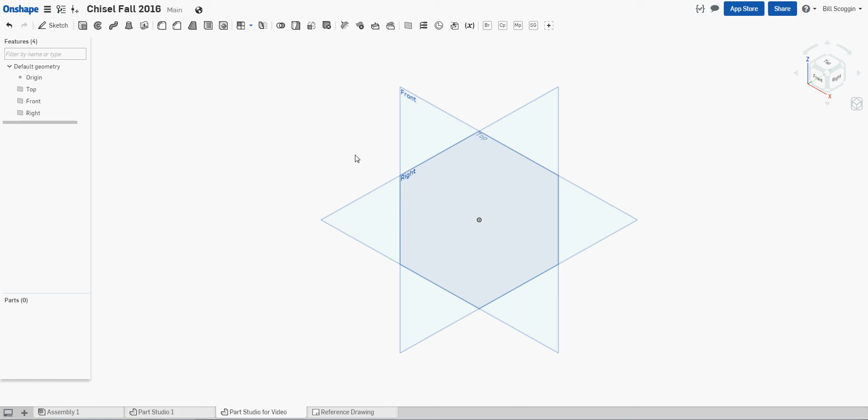Okay, going to draw the chisel based on the tutorial you were given in class, starting with creating a sketch in a part studio on the front plane. View normal to the front plane. Draw the side profile of the chisel, looking at our dimensions at 7.25 inches.

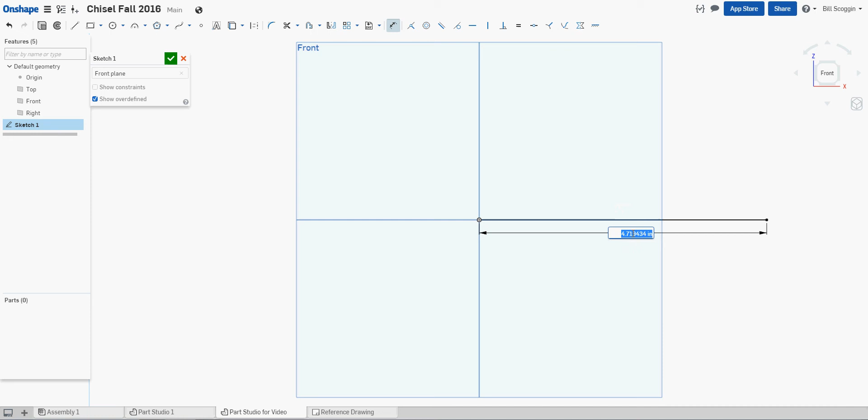Everything we'll do will basically be based on the dimensions of this and the origin of our drawing. Going to come up, over, over, down, and draw one more line up here.

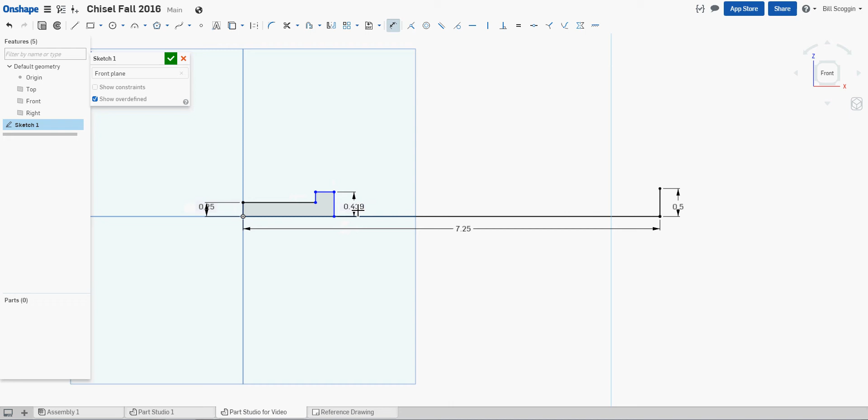Now I'm going to assign some dimensions. This is 0.5. I know this is 0.25. I know this is half of 0.812, or 0.406. I know this is 0.187. And I know this is 1.687.

I also know I've got a couple of key points where arcs and such occur, and one of those is at 4 inches to the left of the end, so I'll use the offset command to do it. Offset is one we use quite a bit in these drawings. I'll offset it again to the left at 3.5 inches.

That's going to be two key points right here. Also, these two lines, I'm going to go ahead and make them construction lines because I don't need them to be part of the final model. Another...

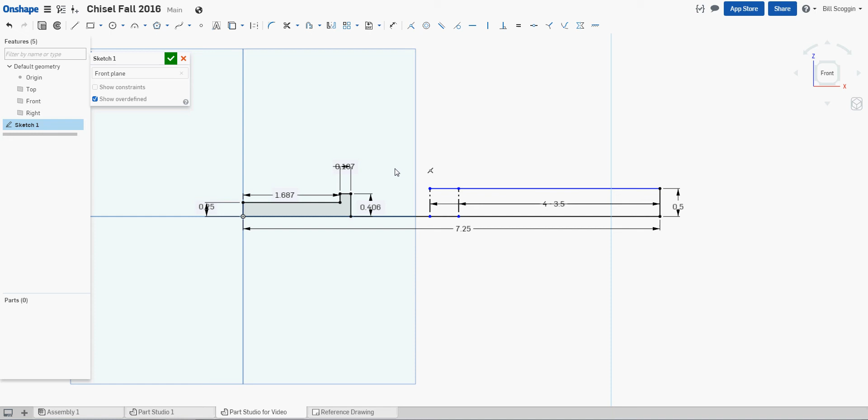...thing I'm going to do is draw a line from here. Come on, line command. From here to here. And now I'm going to extend this line over because I know the line of the body from here and here is the same. So I'm going to use this command called extend, which is a very useful command.

I'm going to extend it over to here, and then this area right here I'm going to cut out because I don't need it. So I'm going to trim it away.

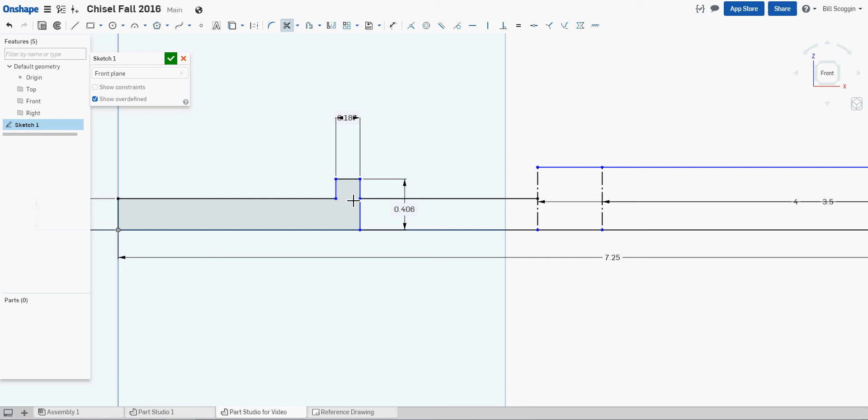And now I'm going to do the radius of this cut. And I look at my drawing, I see it is a 1.25 inch diameter circle. So I'm just going to draw that circle up here somewhere.

I've noticed this trick works really good for this particular drawing. I've tried it about 100 other ways, and so far I like this method the best. If I come up with something better later, I'll do another video showing a better way of doing it. But for right now, I'm happy with this.

I'm going to use the offset command, and I know that the distance from here to here is simply a quarter of an inch because this is 0.25 and this is 0.5, so I'm going to offset this line upwards by 0.25.

And I'll drag this out where I can read all this a little better. Put that diameter up there, and all I'm left with is this little arc that I need from here to here. This arc needs to be placed from here down to here.

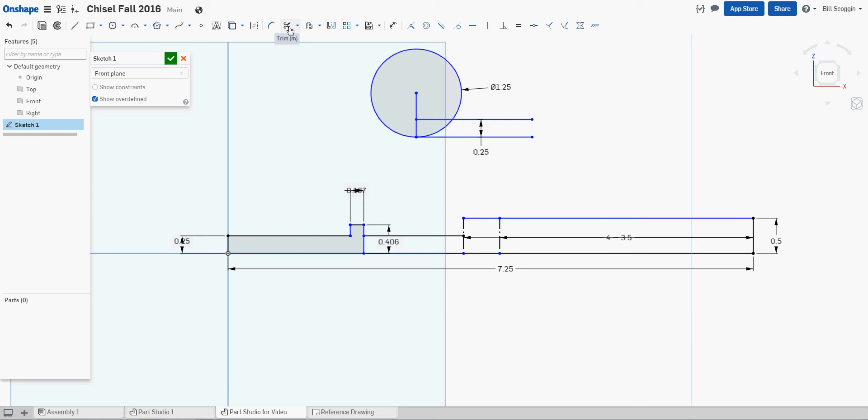So to do that, I'm going to cut this away using trim. I'm going to trim away everything I don't need except my arc. And now I'm going to escape the trim command.

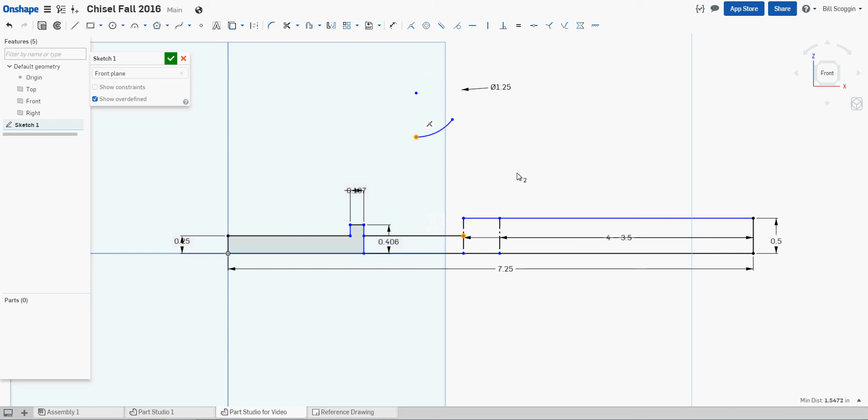I'm going to define this point. Actually, let's do this point. Let's escape and select this point and this point, and let's make them coincident upon each other. And see how that moved that line down?

It moved that piece of that arc down to here and created a surface in doing so. It closed this object. With that being said, I don't need this little piece of line anymore, so I'm going to cut it out of the way, trim it out.

And now I need to get this little section up here. Before I do that, I want to check my dimension right here one more time. Okay, it is 1.687. I don't know, I must have actually deleted the dimension line a minute ago.

But anyway, let's get these where I can see them. Let's go ahead and constrain that again just to be sure.

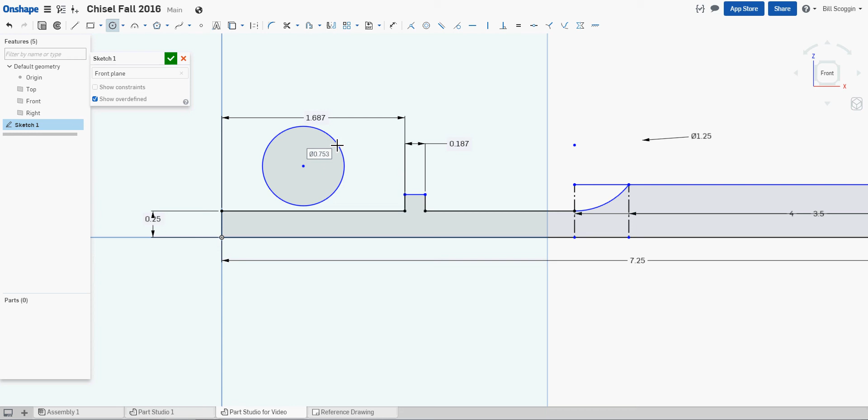Same thing, just a slightly smaller circle. This circle has a radius of 0.5, or a diameter of 1, and I'm going to move it up here, or better yet down here out of the way somewhere for a moment where I can work on it.

I'm going to find that 6 o'clock point, go off to the right again, offset the bottom up, and I've got to be careful here. This time it's the difference between 0.406 and 0.25. I can just type it in as a subtraction problem here, and it will take care of the math.

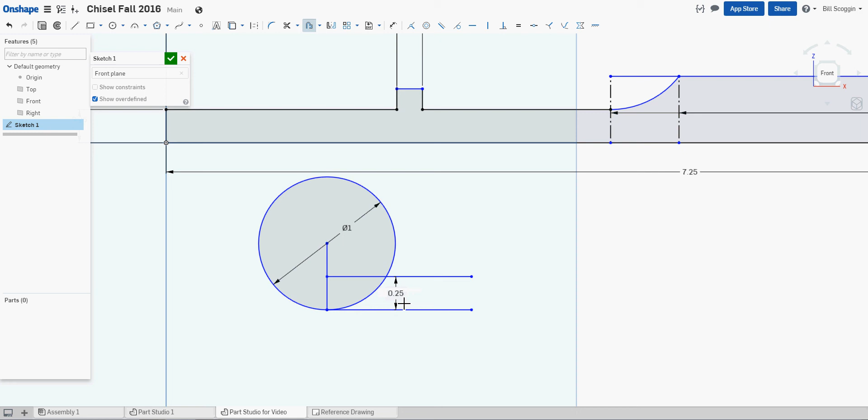Or if I happen to have a calculator, I could punch it in myself. I find it works better to let Onshape do it. Saves from having to hunt a calculator, and you can also go back and adjust it if you need it.

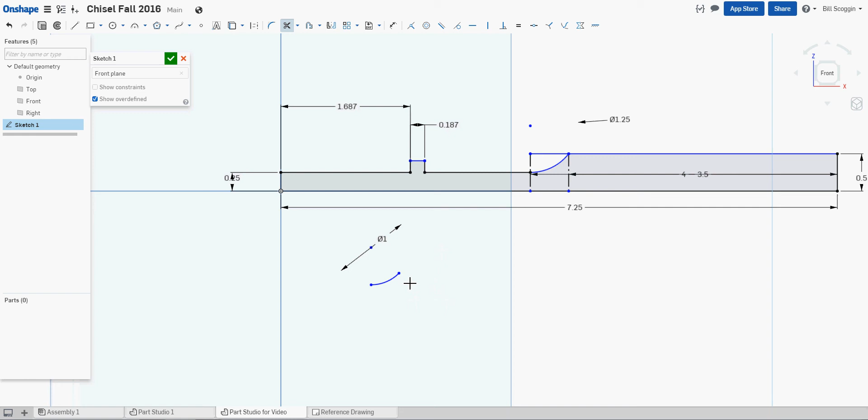So I'm cutting away everything I don't need, and I know that this point here, so I'm going to hit escape. This point and this point need to coincide with one another. And now I'm going to trim away the internal parts that I don't need. So I'm shaping the outer profile of this chisel handle.

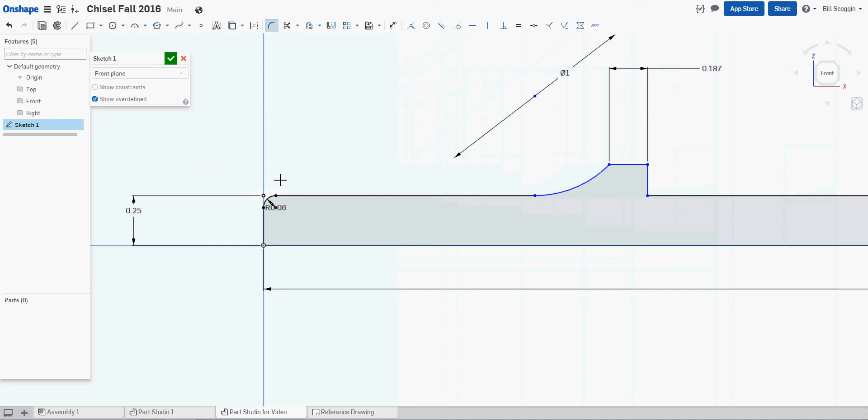Now I need to assign some fillet commands to assign a 0.06 radius here. And over here I need to assign a 0.09 radius.

Okay, so I'm getting pretty well to the point where I think I'm about done with the profile. So I'm going to edit the name. I'm going to call it Sketch 1 Side Profile. And I might want to call it Chisel Side Profile, so if I'm looking at it later, I'll know what I'm looking at.

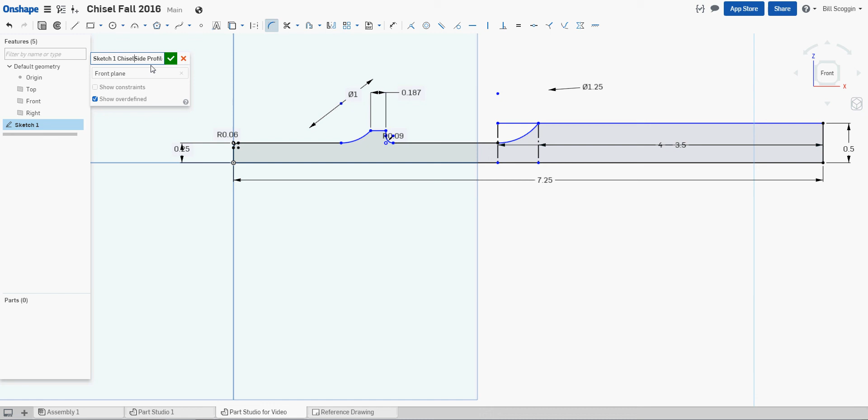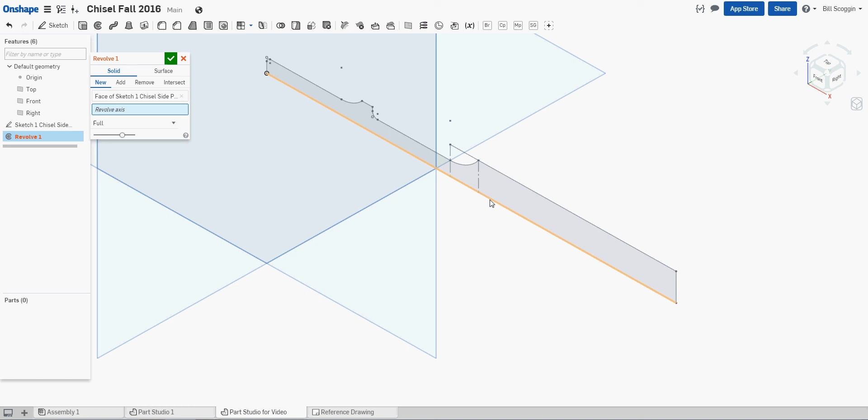Okay, now before I revolve things or extrude things, I tend to go to the isometric view. You don't have to, but for me it works. So anyway, I'm going to hit revolve now. I'm going to select this surface, and revolve axis is still red, so I'll click in that box and then click that line. And that gives me the preview of what it's going to look like.

If I want to darken it in where I can see it better, I can play around with this slider, but at this point hit OK, hit check mark, accept it. And now I have my side view of my chisel.

Okay, now the next part of the drawing is going to be to cut the blade out. We've got this big hunk of steel bar stock basically that we've at this point would have turned on a turning lathe, and now we've got to make this cut across it. At least we visualize in our head that way.

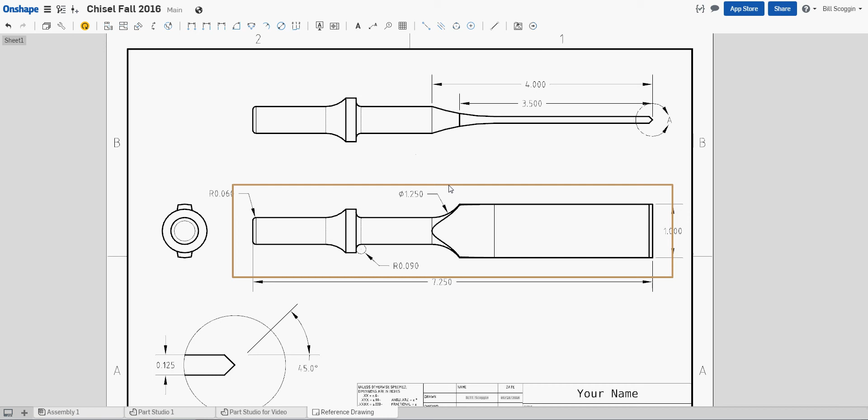And I look at my drawing and I see that, from the one you were given in class anyway, this was a 7-inch diameter circle, and I don't have that on this dimension yet, but if I were to dimension this little arc right here, it shows me it's 7-inch diameter.

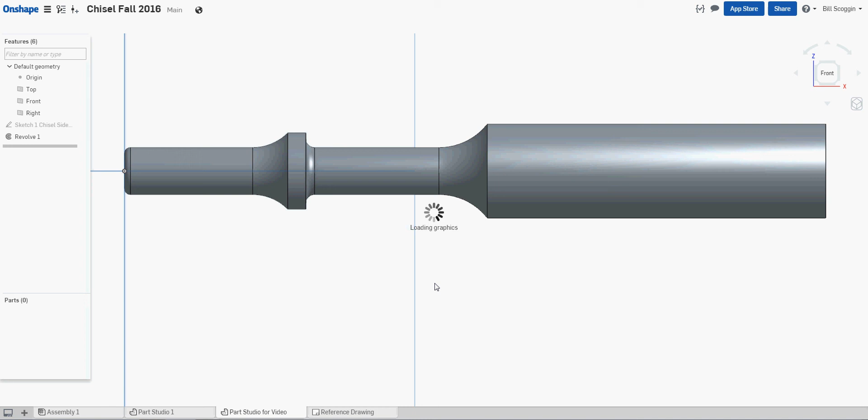So anyway, to create that, same trick we did earlier, I'm going to create a sketch on the front plane, and I'm going to draw a construction line right down the center. So basically I've got 2 drawings at this point on top of one another. And I need to assign dimension 7.25 again.

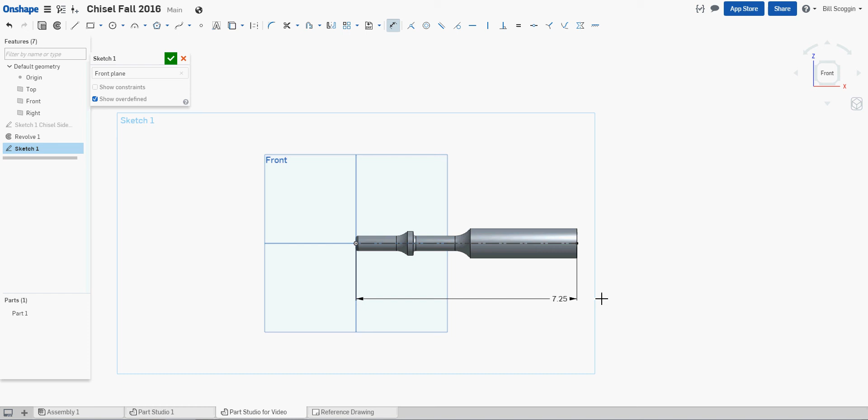And I need a couple of key points defined. I need this line can be a construction line. I need that line offset to the left by 4 inches. So tell it to the left, enter, 4 inches, enter. That gives me that point.

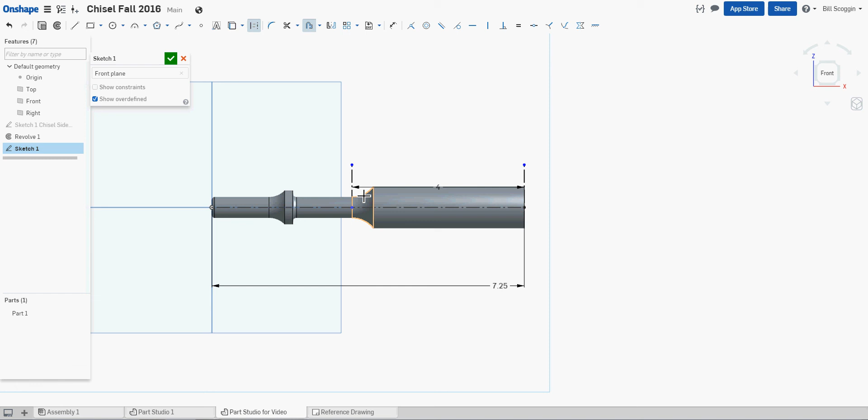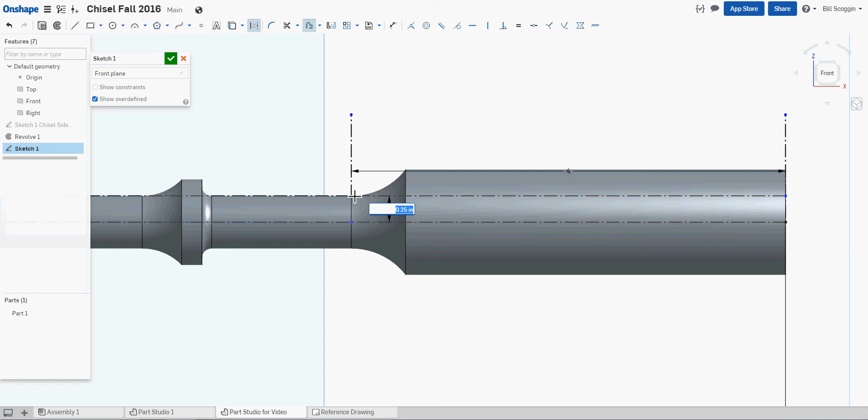And now I need to define the point right where these 2 lines cross, the top of the bar part of the chisel and where the radius of this flare out starts. So I'm going to offset the center line once again. Hit escape, offset, go upwards 0.25. That gives me a crossing right here. And if I use my point command, I can assign a point or define a point right there.

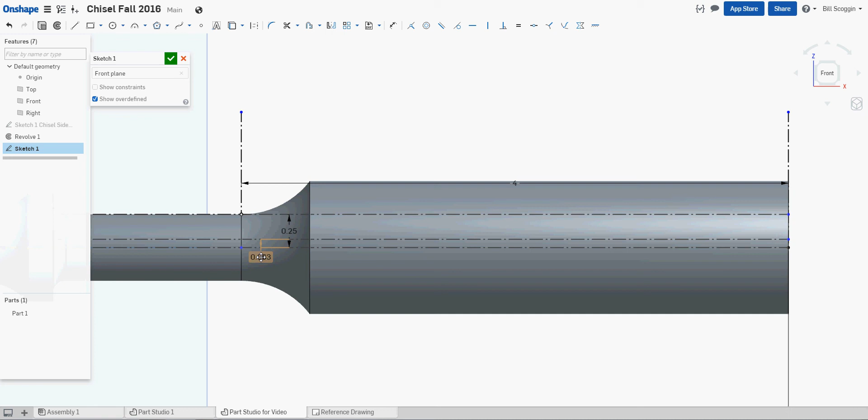Now I need to offset the blade thickness. So once again, I'm going to use offset, and I know that it is 1/16 of an inch. So I type in 1/16. And these dimensions are getting kind of on top of one another, so I'm going to drag this one out to the left a little bit, and drag this one off to the right a little. Since they're all construction lines, they won't interfere with each other.

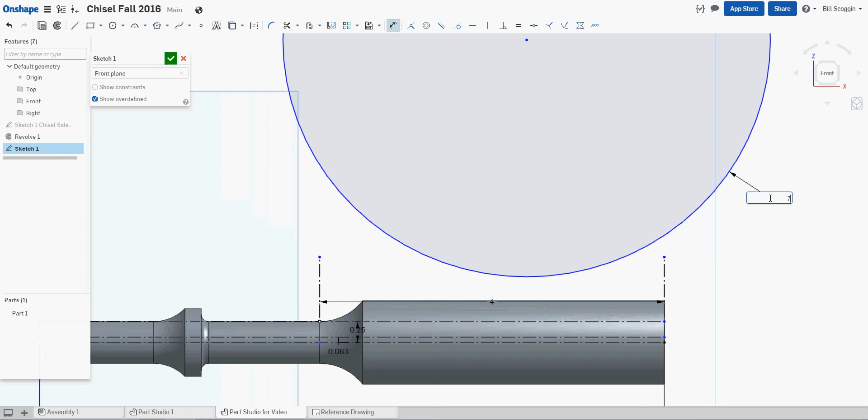Now, once again, the tricky part is I need a 7-inch diameter circle. So I'm going to draw the circle, assign the 7-inch diameter, and once again it kind of fell on top of what I was doing. So get out of any command you're in, drag it by the center up here where you've got room to work.

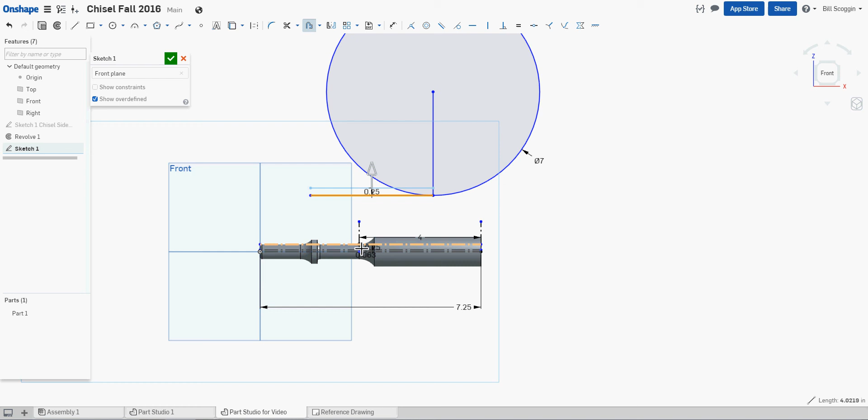And we're looking at a piece of the arc down in this area here. So let's draw the line straight down, off to the left, and this time I'm going to offset my bottom line upwards by 0.25, because it's the arc right in here, 0.25 down to the 1/16. So 0.25 minus 1/16 of an inch. That gives me that little piece of an arc segment that I need right here.

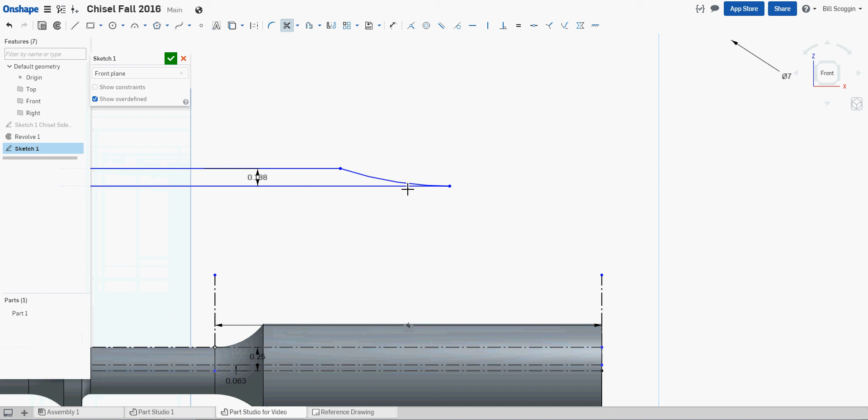So now I can use my trim command and start cutting things I don't need away. There's the little piece of the arc segment that I need. And once again, we will apply this trick of selecting point and point to that point we previously defined and go coincident. See what that did? It laid that arc right down on top of here, tangent to my blade line.

Now I'm going to cut away some of this blade marking line back to right here, and then I'm going to turn this section of the blade construction line back to a solid, so it'll become part of a surface.

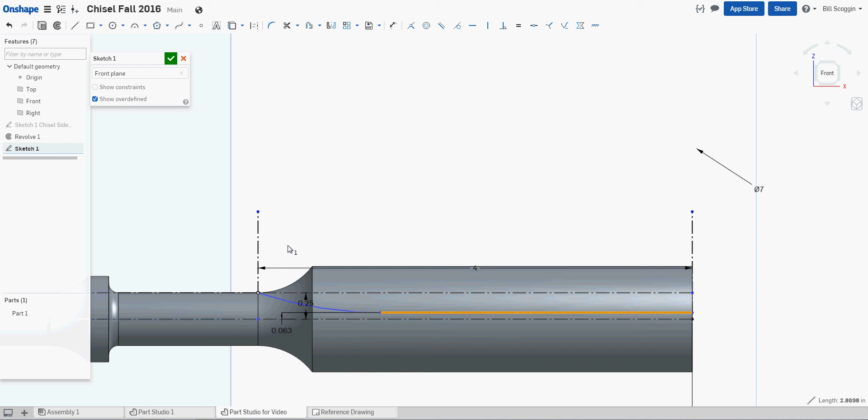Now, to do it all in one step, I can also define the blade cut right here. I can draw a line out this way. I'm just going to let it kind of run wild for a second. And I can assign a dimension of 45 degrees to this.

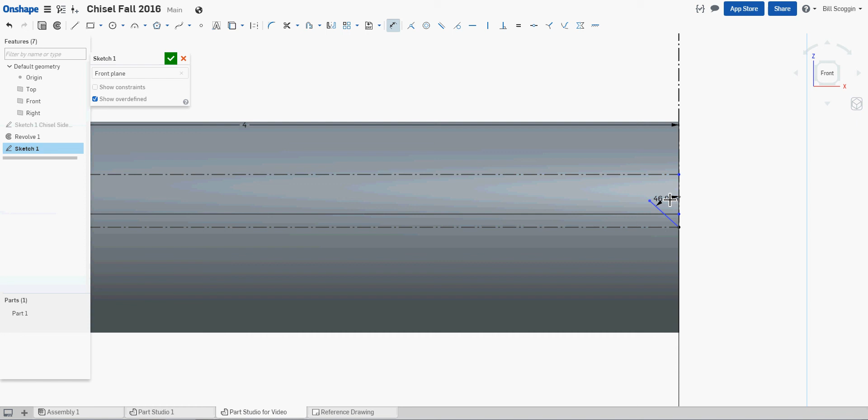This could also be done as a separate step. I've played around with it both ways and it doesn't really matter. You just have to cut away the proper things at the proper time. So what I need to do is cut away this little piece right here and this piece here.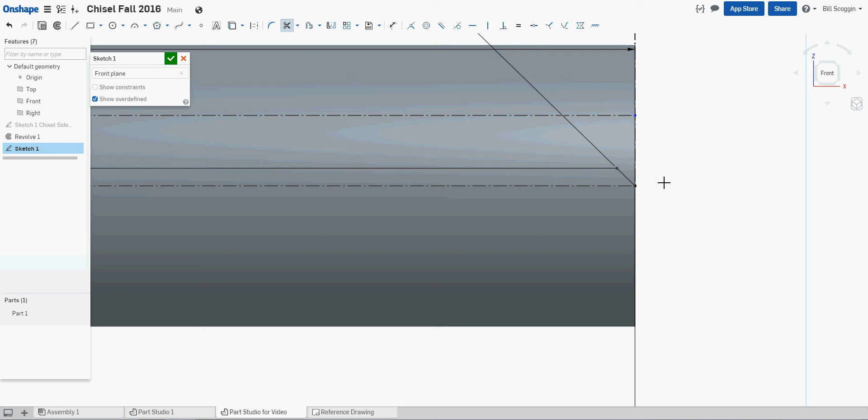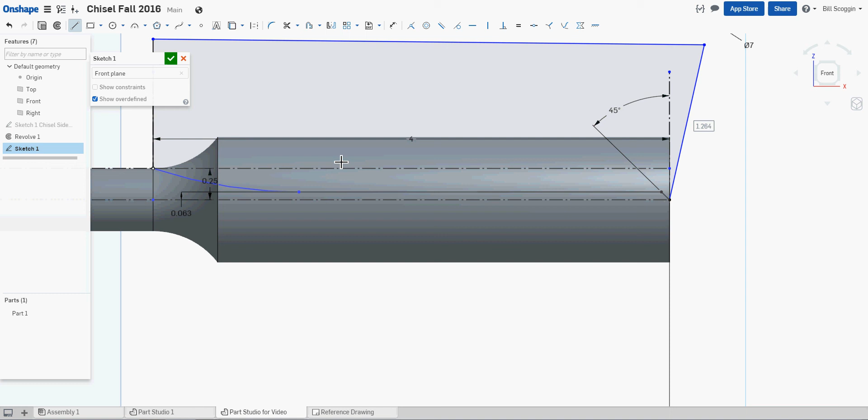To leave this shape here. Now to finish my final cutting surface, I need to draw a line from here that's a solid line. I need to draw a line up, and I usually just go straight up, even though it could be on an arc, it doesn't matter. Down to here, down to this point right here, and I will have defined a surface that has the side profile including my 45-degree cut as part of it.

At that point I need to do a mirror image of my cutting surface plane that I've just drawn. So I get my solid line, my arc, my blade definition line. Oops, I hit the wrong one. I hit my center line, so I'm going to hit this one.

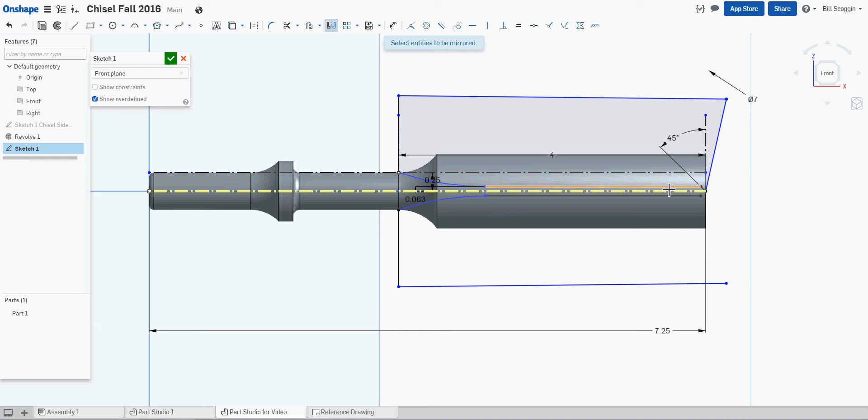Now be real careful, zoom in where you can see and get this one. I notice that defined another arc right here. Not an arc, another surface. So now we've got a surface defined, and I'm going to call this Sketch 2 Side Cut Profile.

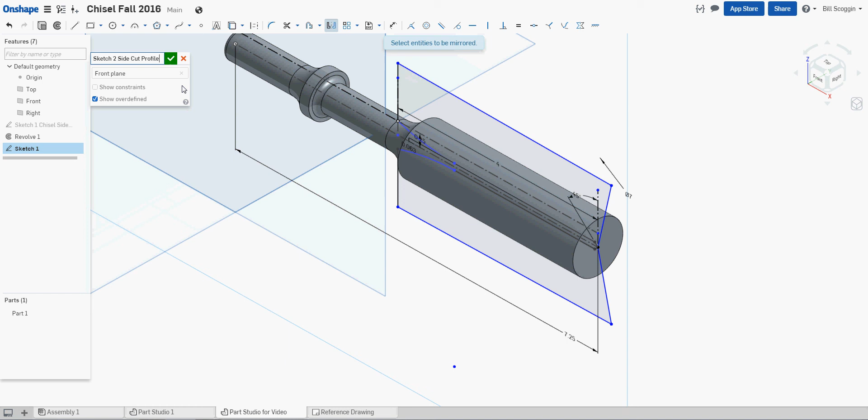Now to finish up our chisel, I'm going to do a remove extrusion once again. I'm going to select both of these surfaces, hit merge with all, and accept it, and I see that cut half of it away. And see it give me my chisel cut, my point, all in one shot.

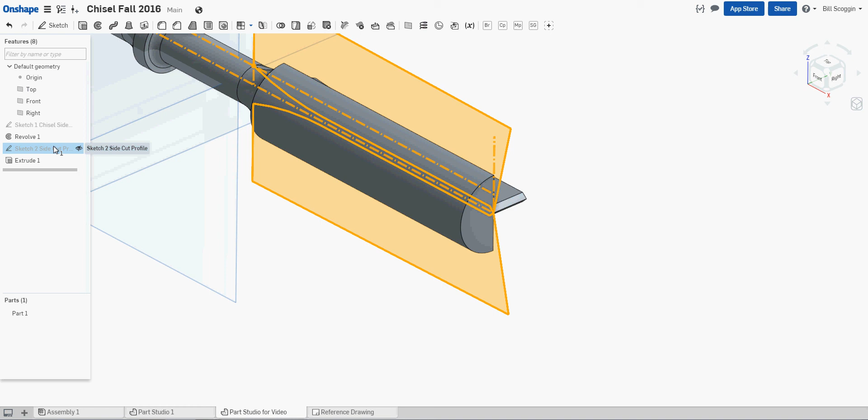I'm going to do the same thing. I'm going to select my side profile again, do another removal, reverse the direction so it cuts towards me. I see the preview and I see what's left of my chisel. I hit merge with all, and now we have our chisel. Looks pretty good.

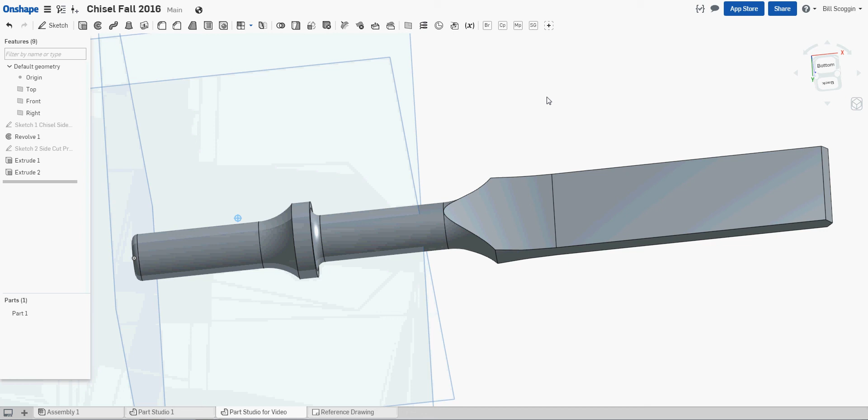A very difficult thing to visualize is these curves, but we can see it now that we've drawn the 3D object of it. So anyway, now to finish up our project, we need to create the drawing.

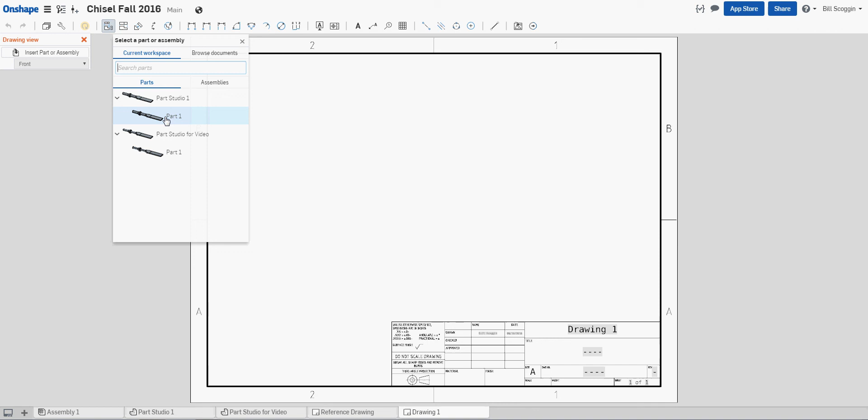So I hit the plus sign, hit create drawing, choose the A template. I'll insert the part that we just drew, Part Studio for video. And it usually comes in at a different scale than 1:1. So once it's in place, double click it, come over here, select 1:1.

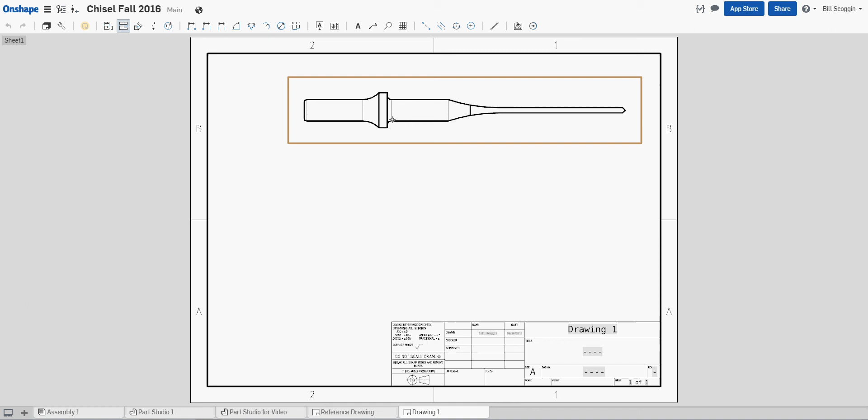Make sure you hit the checkbox. Slide it over a little bit, give ourselves room. We're going to do the projections. So we're going to project to get this view, the view I guess from the bottom, same as the top since this is symmetrical all the way around. I'm going to do another projected view out to the left.

So essentially this could become a top view, this becomes a side view. We could even put text and stuff in if we wanted to in here. We've got commands to do that up here. Dimensions, I'm not going to dimension everything, just do a few key points to show you how to do it.

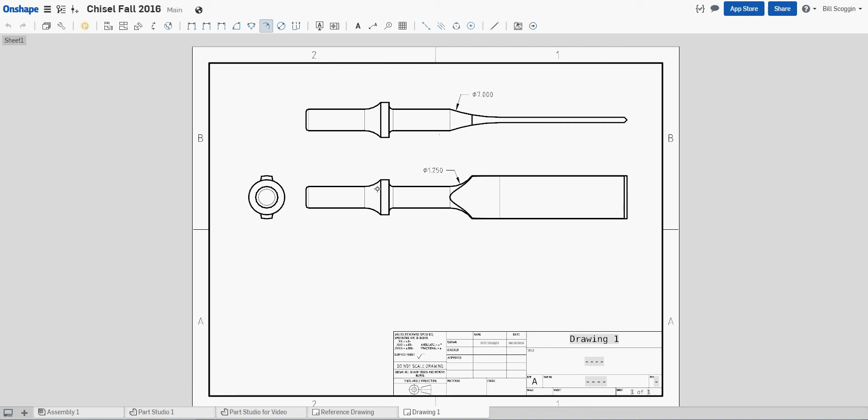To get my diameters, I can use the diameter dimensioning tool. It shows me the diameter. So I can do here and here. To get my radiuses for the dimensions that are shown as radiuses, it's the radial dimension tool, such as here. It's good for the fillets and the little curves.

Be careful with this though, as it follows, the circle follows it, and sometimes you don't want that, so be kind of careful with that. Linear dimensions are real simple. 2-point dimensions, I could pick the line here and the tip of the chisel point here to get my.

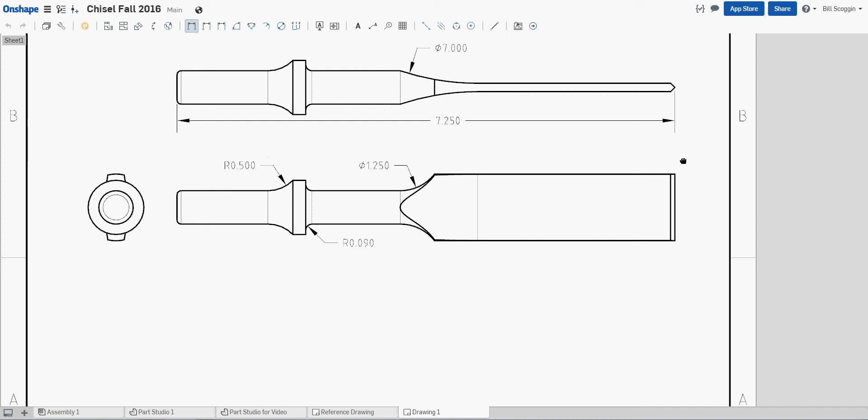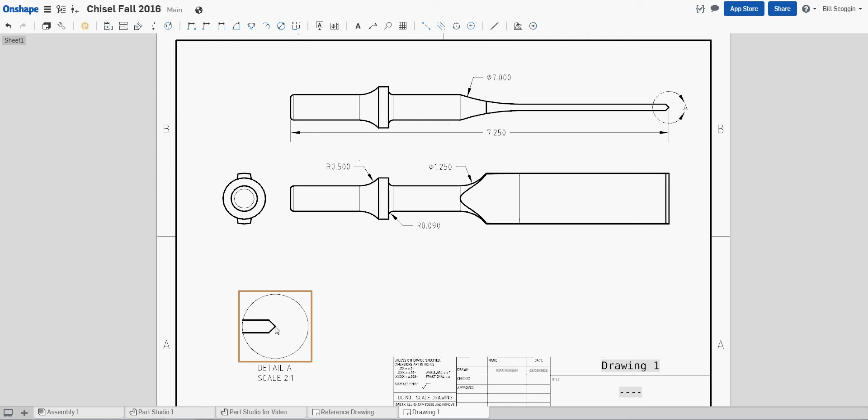Overall length. Now the detail view down at the bottom, that's also automatic. It's done right here with this detail view command right here. Come over here and check on the, click on the very tip of the chisel, put a little circle around the area you want to zoom in on for a detail view, and then drag the detail view wherever you want it.

I'm going to put it down here because it's a sort of an empty area of my drawing. We need to get the chisel's thickness dimensions, so I can do it on the detailed view right here. So I could do it here, drag it off to the left.

I need the angular dimension. This is about the only really tricky one here. These angular line-to-line dimensions. We've got to show this as a 45-degree cut somewhere or another, and we don't have a vertical line to reference it to. So I'm just going to reference it from this line to this line and let it come out the side. That'll get the point across. It lets somebody see that it's a 45-degree cut.

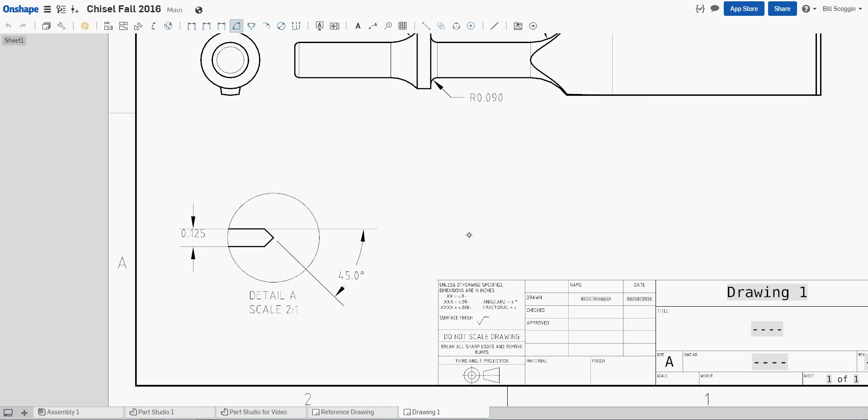And you would need to finish up your major points here and here, and a couple of dimensions, the circular, the diameter dimensions here, which once again that's pretty straightforward.

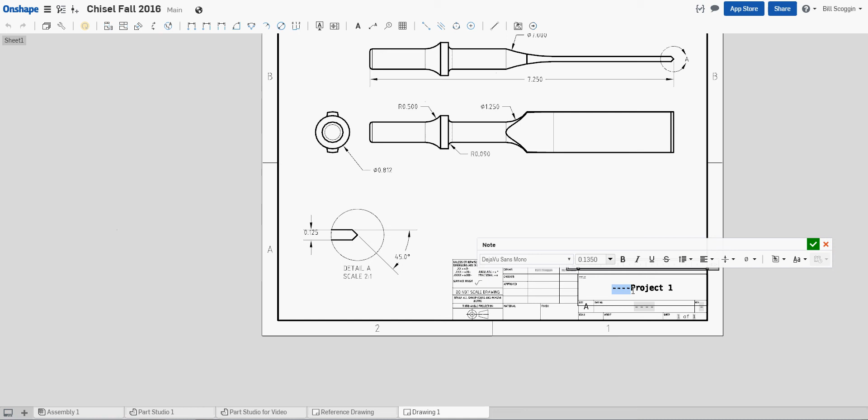Then to finish up for your assignment, come down here for your drawing, put your name in here. Always hit the check box. Whatever project it is, in our case probably project 1, and watch these little dash lines. They tend to not go away when you want them to. Their default text, and that finishes our assignment.

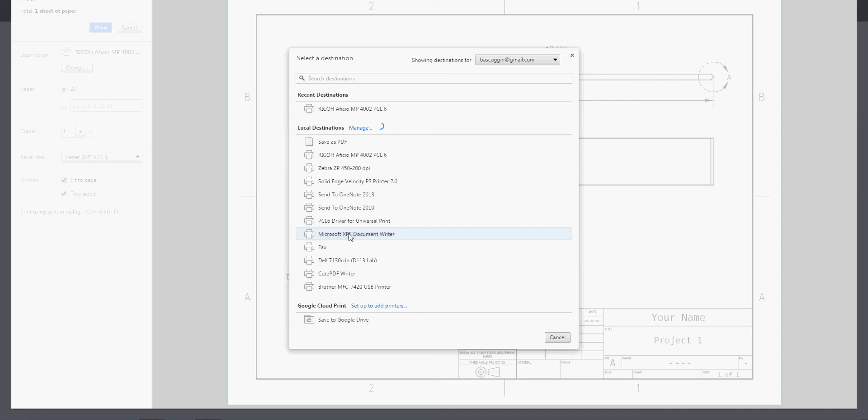To print it out, come up here to the little menu command, hit print. Typically I'm going to want a Microsoft XPS document, so when you hit print it brings up a printable version of it. Looks pretty good. Hit print, change to the Microsoft XPS document writer. Fit to page is fine for what we're doing. It might not be if you're doing this for production, but for what we're doing it's plenty good. Hit print. I'm going to hit cancel, and that concludes our video.